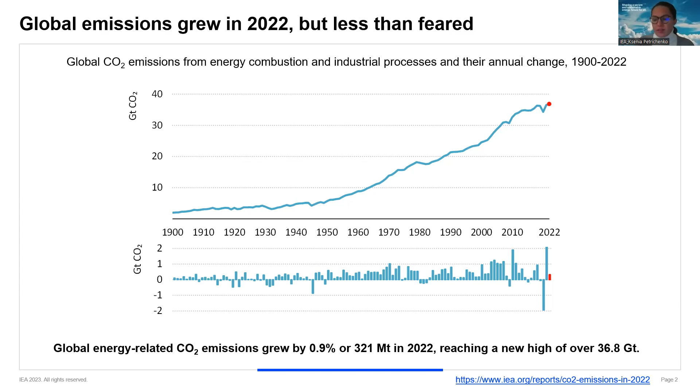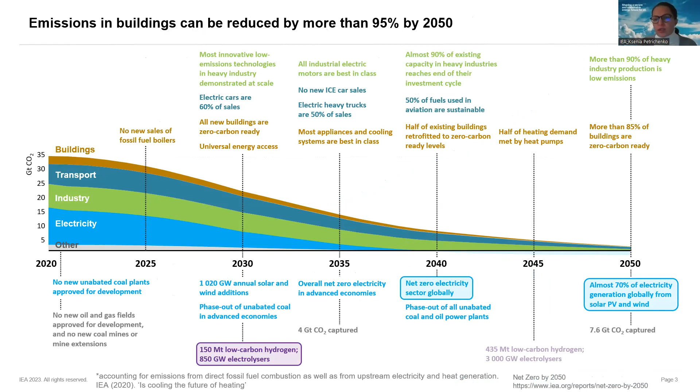With that, we at IEA developed a roadmap to net zero by 2050, which looks at different sectors and outlines more than 400 technological and policy milestones which need to be achieved between 2020 and 2050 in order to get to those very close to zero levels by mid-century, making sure we can achieve 1.5 degrees centigrade of global warming and not exceed it.

The pathway is still realistic, though the speed at which we are progressing is alarming, as we saw from IPCC reports. In any case, most of the solutions we have, especially if we look at buildings specifically, already exist, and most of them are cost effective in many countries. So what is needed is really accelerated and concerted action on those.

If we look at buildings, here it's only direct emissions from the building sector, that's why it's relatively small in comparison to other sectors. The emissions from electricity consumed in buildings are counted in the electricity part of the chart.

If we look at those milestones, we can't go into details with all of them, but you can have a look at our report. It really comes down to a combination of three things. First of all, improving energy efficiency in buildings, and actually this goes across all sectors. In buildings, it means more energy efficient envelopes, more energy efficient equipment and appliances, phasing out use of fossil fuel boilers as one of the first measures, and getting buildings to become zero carbon ready, as we call them.

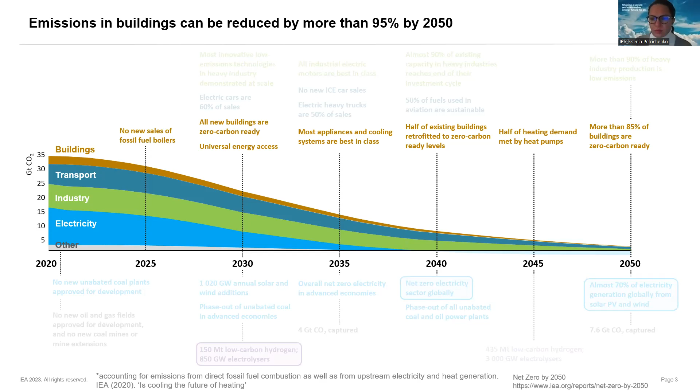So the second thing which we would need to stay on this net zero carbon pathway is a massive shift towards electrification, electrification of different end uses in buildings. It's heating, cooking, ventilation, cooling—all need to be electric.

That also explains quite a significant uptake, for example, of heat pumps, especially in heating-dominated climates, as one of the most efficient technologies for space heating and water heating. They can also be used for space cooling sometimes. And the third thing we need is the electricity supply to buildings needs to be decarbonized, coming from low carbon sources, including variable renewable energy such as solar and wind.

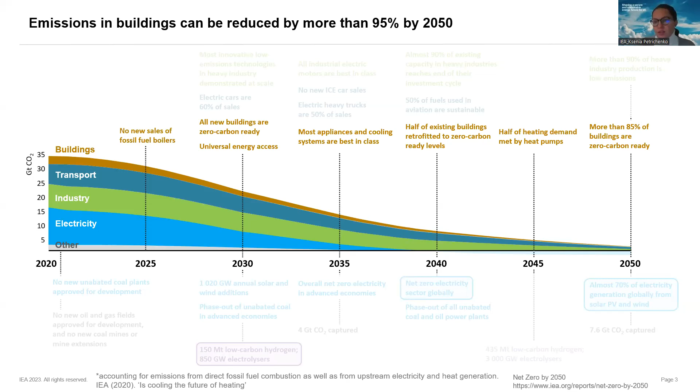Energy efficiency plays a crucial role in this net zero pathway across different sectors, but it has the largest potential in the building sector. As you can see, by mid-century it's responsible for about half of energy savings, and the rest comes from switching to electricity, fuel switching—mainly switching to decarbonized electricity—and behavior changes, which is also very important.

Without having users on board and consumers who are aware why we need to reduce energy use in buildings and how they can do it themselves, it's almost impossible to realize this potential. Avoided demand also includes things like digitalization, smart controls, and any other automatic tools which can help avoid unnecessary demand and optimize energy use in buildings.

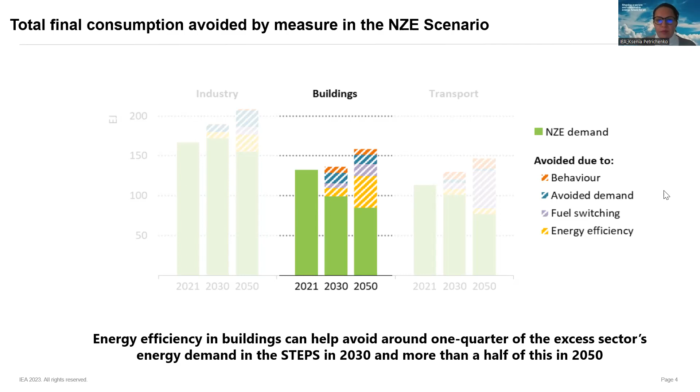Of course, in order to stay in this pathway and realize this potential, we need substantial acceleration of investments and directing investments towards more energy efficient and decarbonized options. We estimate that investments into clean energy need to more than triple by 2030, already within this decade, in order to proceed on this pathway towards net zero.

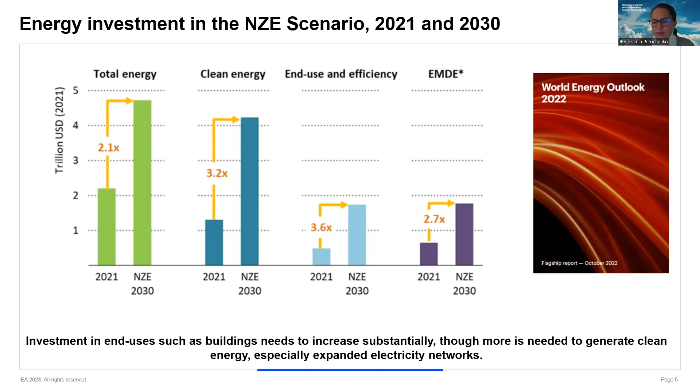For energy efficiency, we need a 3.6 times increase in global investments. A lot of these investments need to take place in emerging economies and developing countries, with a 2.7 times increase in the current levels of investments in those regions.

If we look at Africa, the building sector plays a major role in the region. This is data from 2018, but I presume the picture hasn't changed substantially. The building sector is responsible for more than 60% of the final energy consumption in the region. It's a huge share. In many regions buildings are responsible for a smaller share, but for Africa the building sector is really important. So the question is what we can do about it.

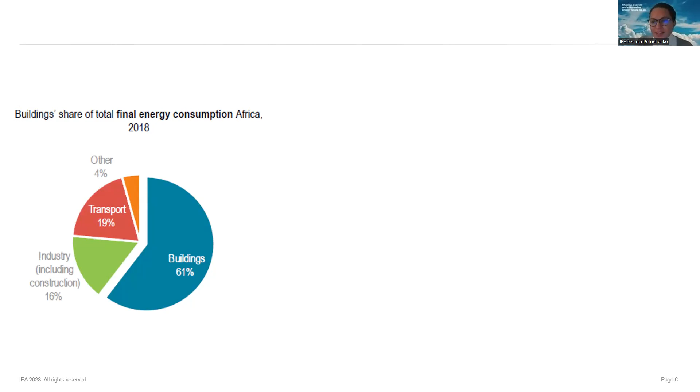I hope we're not hoping for any magical solution. We actually do need to make sure that a lot of efforts are happening in order to tap into this potential for energy savings in the building sector and realize the potential in order to at least get closer to the net zero pathway. How do we do that?

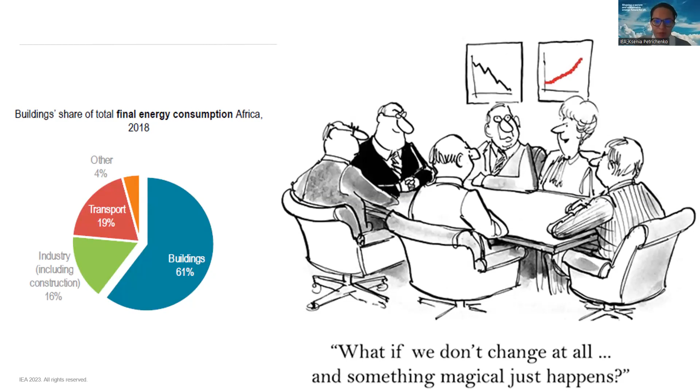We do that through policy development and implementation. Policies are very important because they help us to address a variety of barriers which exist in relation to improving energy efficiency in the building sector.

Financial barriers, so access to finance for funding energy efficient projects, is another typical barrier. Technical barriers - some technological solutions might not be available locally or might not be adapted to the local context of a specific country. Low awareness among both population and policymakers and other stakeholders on the benefits of energy efficiency is a major barrier as well, because it prevents making choices towards more energy efficient options.

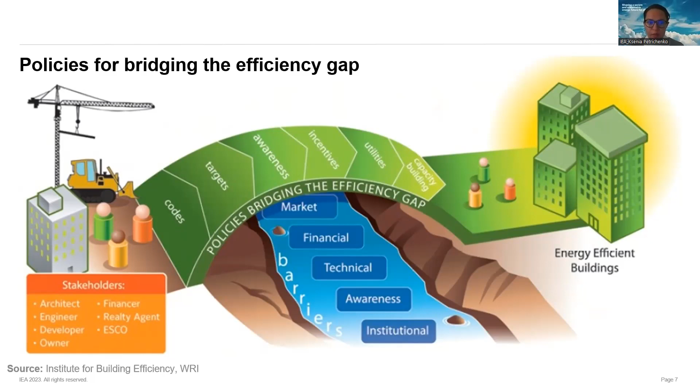And of course, institutional setup is very important in order to drive this policy change, develop policies, and support implementation of different policy mechanisms. On top of that, the building sector is quite complex and very fragmented. It includes different stakeholders who sometimes don't talk to each other or have different interests. So it's very important to have different stakeholder groups on board in this policy development process to make sure we get their inputs and their interests taken into account when approaching the development of policies.

In that regard, we talk about a policy package. Given that the sector is so complex, we also do not have one single policy instrument which can solve all the problems and address all the barriers. So we need a variety of policy instruments to address different barriers and engage different stakeholder groups.

When we talk about a policy package, we mean quite a comprehensive policy framework, which usually starts with setting a target that is both ambitious and realistic in order to improve energy efficiency in buildings. This target informs the choice and combination of different policy instruments depending on the country's context, which usually has a combination of regulatory instruments, information mechanisms, and incentives, and we will look at them in more detail.

Once the policy package is established, the implementation part is also very important. It is one thing to have policies in place or on paper. It is another thing to make sure that they are well enforced and different stakeholder groups are aware of them and comply with the requirements of these policies, or use them in order to realize that energy efficiency potential.

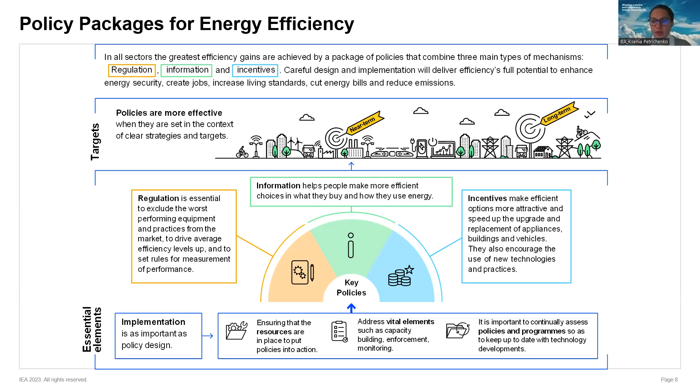So if we look at buildings, I mentioned the policy package consists mainly of three types of policy instruments: regulatory, information, and incentives.

Within the regulatory pillar, we usually have instruments like targets for energy efficiency, including deep renovation rates, fostering market growth, and facilitating investment decisions.

Building energy codes are one of the most effective and cost-effective policy mechanisms across the world. They usually contain requirements for energy efficiency for both new buildings and retrofits, and they're really essential to accelerate the transition towards more efficient buildings.

Minimum energy efficiency requirements can be both for buildings, especially during renovation processes, so for existing buildings to achieve certain levels of efficiency during the renovation process, but also for example for appliances and equipment used in buildings.

And another area of regulation which is emerging is related to the use of digital and smart tools in buildings, and for buildings to become more integrated with the electric grid. We call them to become more demand response ready, when buildings can actually respond to signals from the grid and offer flexibility services.

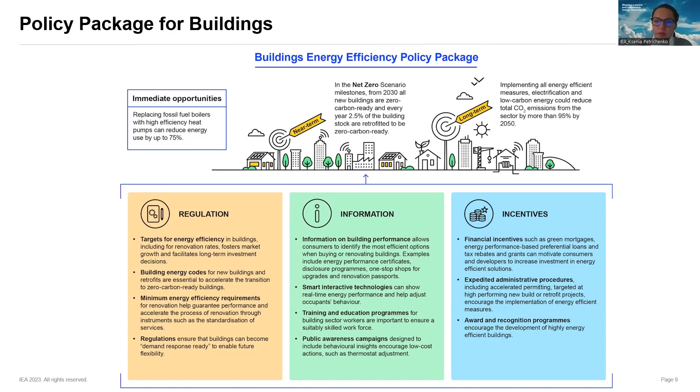So why do we need this policy package, and what role does it play? When we look at regulations, the main purpose of the policy package is to ensure market transformation. What we need is not just pilot projects for energy efficient buildings here and there. We actually need a whole market to transform towards higher levels of energy efficiency and make sure energy efficient or zero carbon ready buildings become mainstream.

In that regard, regulations work as sticks. They offer a market push towards at least minimum levels of energy efficiency required in buildings.

Information instruments, we sometimes call them tambourines - they help to lift the market towards these levels and assist the regulatory instruments. And incentives, both financial and non-financial, offer market pull, helping to pull the market beyond these minimum levels of required energy efficiency towards even higher performance, towards innovation, towards best practices implemented in the market.

As you can see, these three types of policies really need to work together to be able to offer those synergies and deliver the energy efficiency potential.

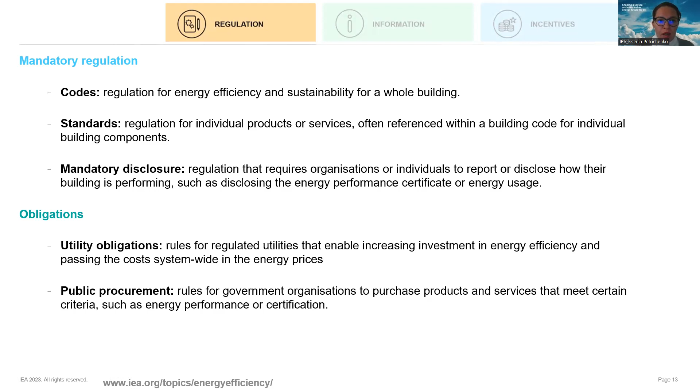There are several types of building energy codes, which is good to know because they really vary from country to country. There are a number of prescriptive codes, which are very close to standards, which set specific requirements for some of the elements.

There is a trend to move more towards performance codes, which set a minimum level of energy performance required for a certain building type, maybe depending on the climate conditions. This performance can be achieved through different pathways with different elements, so there's no need to implement certain energy efficiency measures as long as the overall performance meets the requirement.

Simple trade-off is kind of similar to prescriptive codes, but they are less documented, so there is also more flexibility on how the requirements can be achieved between different components.

Outcome-based codes are a very interesting type, because that's when we move away from theoretical energy, which is usually used in most codes through a model or assessment done at the design stage. Outcome-based codes actually take the measured energy use in buildings and set requirements based on actual use after the building was built and occupied. So obviously it has a next level of accuracy because it also takes into account behavior of people, not just the design.

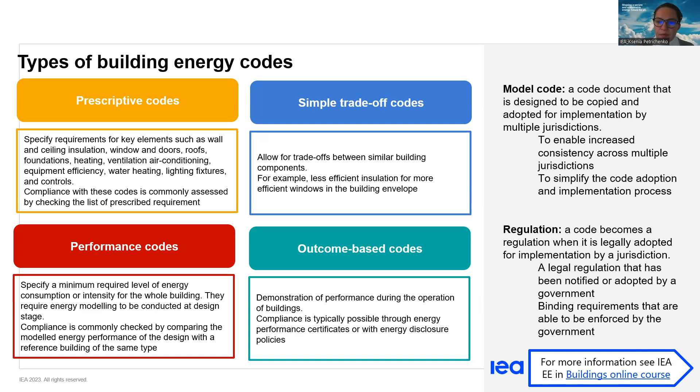At the global level, we have about 80 countries which already, as of last year, have implemented one form or another of the building energy code. Some of them are mandatory, some of them are voluntary. About 30 countries are in the process of developing a building code.

But from this number of countries, only two-thirds have mandatory building codes. And our research shows that voluntary building codes, while it's good to have and it's very informative and provides a certain level of information to the market, are much less effective in terms of achieving the impact—in terms of achieving actual energy savings—than mandatory building codes.

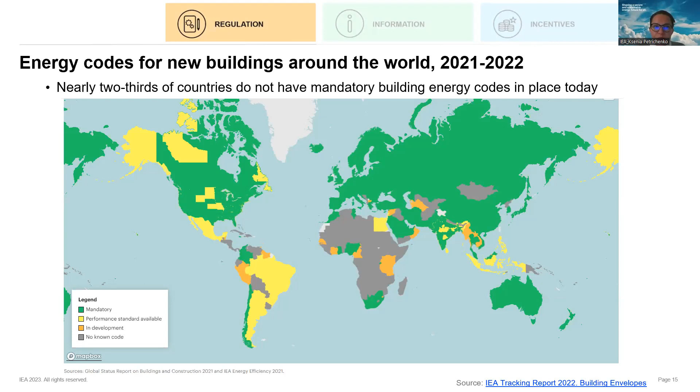As we're talking about the net zero pathway, building codes are really one of the more fundamental starting points to begin on this pathway, and they do take time to develop. We looked at some countries with a long-term history of building regulations and energy efficiency requirements, and our research showed that it could take anywhere from 6 to 22 years from the announcement of a net zero goal for buildings to the development and implementation of the building energy code that reflects that target. So it's quite a complicated and long process, and it just shows that we need to start working on it as soon as possible.

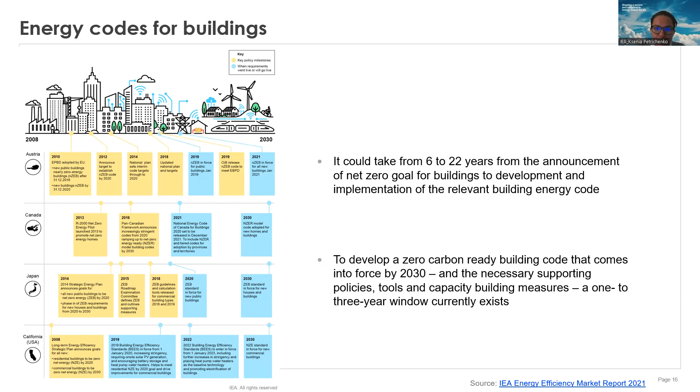In terms of implementation of the building energy code, as I mentioned before, it's not just enough to have a policy in place—we actually need to make sure we implement it well and it works. For building codes, usually there are different implementation mechanisms which include inspections, checks for compliance, and different permits. So this is just a generic process of how it can look.

We can start with, usually, a construction permit at the design stage, where there is a designated authority which reviews the plan, the calculations, the proposed materials, assumptions, and the model used for achieving the results for the design of the building.

There are, in some cases, checks at the construction stage as well to make sure that everything goes well, but in many countries it's mainly focused on safety requirements and much less on energy performance requirements. Several countries have in place the occupancy permit, so after the whole building has been built, we also need to check compliance before occupancy happens. It can be tied to issuing this occupancy permit to make sure that all those stated measures for energy efficiency have been implemented during the construction process. In rare cases, there are also compliance checks post-occupancy to make sure the building is functioning the way it is supposed to.

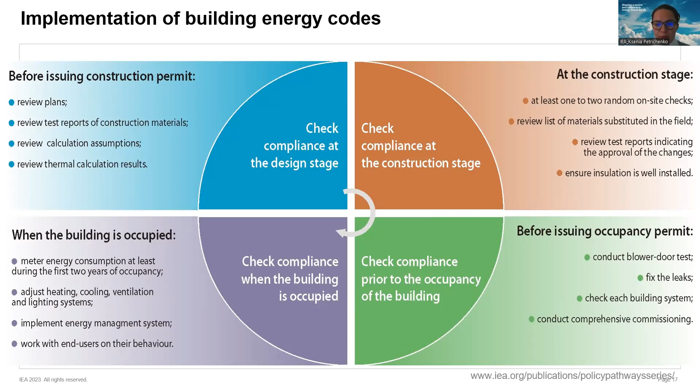Moving to the information part of the policy package, here we have instruments like energy performance certificates, which document basic building information and energy performance. They very often come together with labels, both for example for appliances and equipment, or for the building itself. Building passports are becoming quite widely used in Europe, which is even more detailed documentation for buildings, including construction materials, systems in use, but also different renovation cycles and energy efficiency measures implemented during the renovation process. I mentioned already capacity building, so things like education, training, professional certification, and authorization are also instruments which can help deliver the policy package.

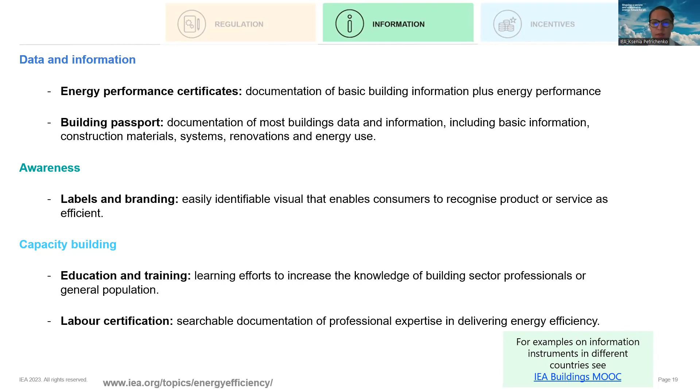These are just some examples of what I meant by energy performance certificates. I'm sure you've seen them, and there are a number of African countries who also have similar schemes and approaches. This is just from several European countries. They usually have some sort of classification and position of the building in one of the energy classes, and their performance in terms of different indicators - it can be energy consumption per square meter, it can be carbon performance, can include information on energy costs as well.

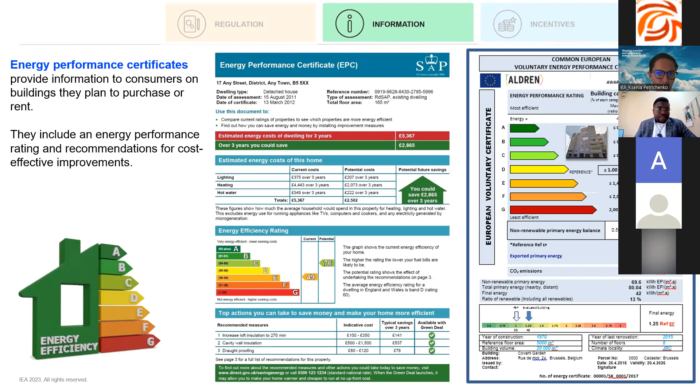And the last pillar is on incentives. I mentioned we have both financial and non-financial incentives. Financial is quite straightforward - it's different loans, rebates, mechanisms, grants for specific energy efficient products, or for example for renovation measures which can help improve energy efficiency in buildings. Non-financial incentives can be something that doesn't involve monetary reward but still helps incentivize construction or renovation of more efficient buildings. For example, for more efficient buildings, the times for approvals and receiving those permits can be reduced - expedited procedures - or they can get permits for larger buildings if they are performing better.

Some examples of financial incentives. In Europe, they have become quite prominent, especially in the past couple of years, given that energy prices have increased so much, and the region is really trying to reduce reliance on fossil fuels, also in relation to the ongoing war conflict between Russia and Ukraine. So a lot of incentives are going to energy saving works, the renewable heating system in France for example with interest-free loans for renovation works. In Scotland, we have the Warmer Homes Scotland grant, which can cover up to 100% of costs for upgrades to reduce home heating costs. Energy efficient mortgages are another way to incentivize borrowers to improve energy efficiency of their buildings, and it's not only common in European Union, but also in countries like India and China.

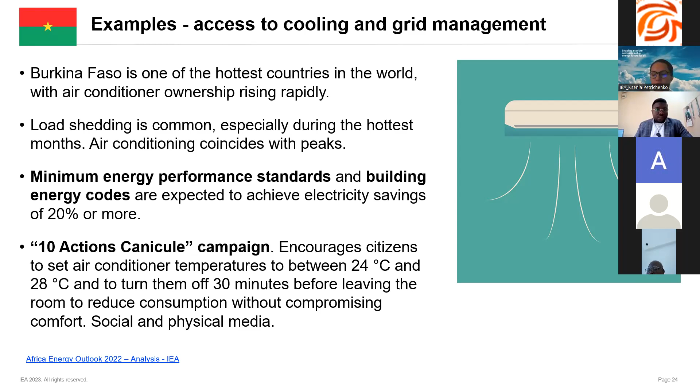A quick example from Africa, from Burkina Faso, on cooling. The region relies on space cooling more and more due to the climate, and as climate change puts more pressure on increasing temperatures, it will become even more crucial. It is estimated that minimum energy performance standards for air conditioners and building codes to improve building envelopes can deliver at least 20% savings on electricity in the country. There is also an awareness raising campaign called 10 Actions Canicule, which encourages citizens to set air conditioner temperature a bit higher than usual, between 24 and 28 degrees, and turn them off 30 minutes before leaving the room, in order to reduce overall energy consumption for cooling without significantly compromising the thermal comfort of people. This campaign goes through different social media and physical media channels to explain why it is important and what people can do.

I would like to have a quick run through of a real case for a policy package example, how it looks like for example for Australia. It's a country which also has a quite cooling dominant climate, which is relevant for the Africa region as well, and also has a long history of implementing various energy efficiency policies in buildings.

So I think it's just interesting to see how different policy instruments interact in practice in this example.

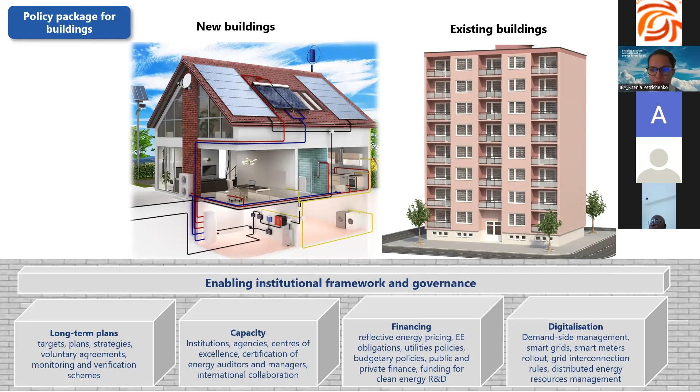Just to remind what we mean by policy package: there needs to be some enabling institutional framework and governance, which includes certain targets, plans, and strategic vision for energy efficiency improvements. There should be sufficient capacity in terms of institutions and skilled workforce. Financing: there should be financial mechanisms and budgetary mechanisms to support energy efficiency improvements. And digitalization, I already mentioned, there are several digital tools and smart solutions which can also drive energy efficiency in buildings further. They're kind of cross-cutting, that's why they're supporting this framework.

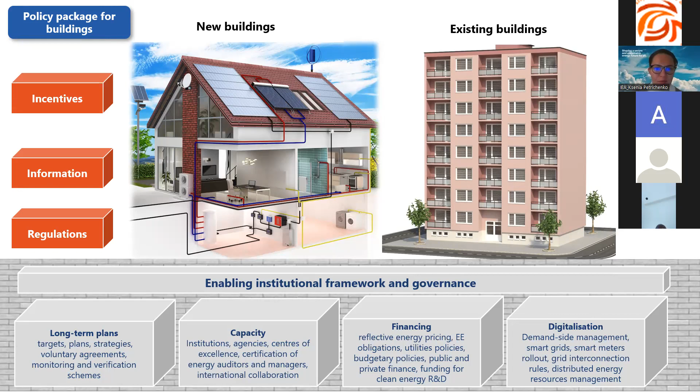And we will look at regulations, information, and incentives as the three key pillars we just discussed. In terms of regulation, in Australia it is based on the National Building Energy Code, which has quite a long history. The first building code was implemented in the 80s. It's mainly focused on overall safety and energy requirements, but really from the beginning of the 21st century, they started integrating energy efficiency provisions and updating the building energy code every 3 years, strengthening those requirements more and more.

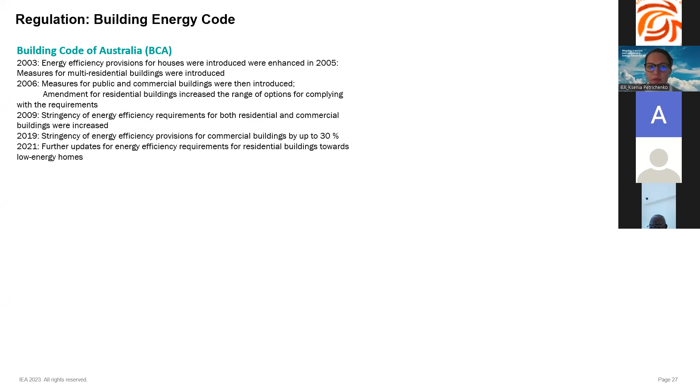There is certain flexibility in compliance with those requirements. There are performance requirements for different types of buildings, but there are also more element- or component-based requirements prescribed for different parts of the building, such as building fabric, glazing, and so on. And there are several alternative solutions which need to be approved by the Building Control Authority, who inspects and manages, and makes sure that those requirements are being met. So either performance-based requirements need to be met, or some combination of component-based and alternative solutions needs to be implemented. It's a quite thorough verification process to make sure they're actually being met.

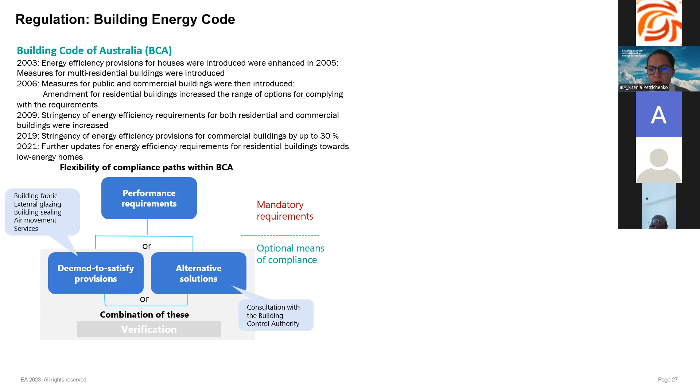Australia has 8 climate zones specified in the building code, so they set specific energy efficiency requirements depending on the type of building, but also on the climatic zone. Different states and territories at the subnational level have their own building acts to document how these requirements are actually going to be implemented in their specific context.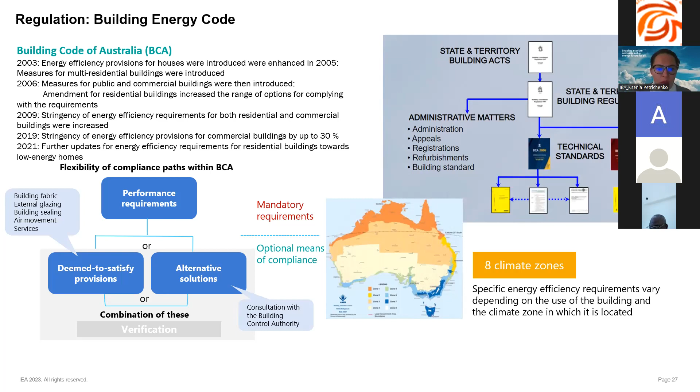Another important instrument of the policy package, which is kind of on the border between regulatory and information type instruments, is mandatory disclosure, certification, and labeling. These are slightly different instruments, but they're all linked together by the rating system in place in Australia, the National Australian Built Environment Rating System, or NABERS, which includes components of all these 3 elements.

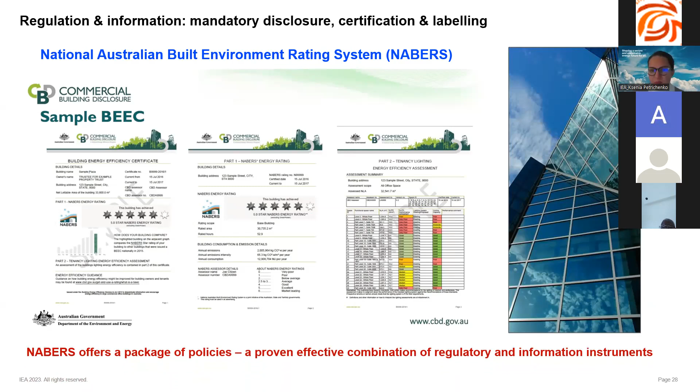It already in itself offers a package of policies and links different policies together in an interesting way. Basically, it's a rating system. For commercial buildings, each building, depending on the assessment and inspection, receives a building class represented by a star, from 1 star to 6 stars. The better performing the building, the more stars you get. And there are certain requirements set in relation to the number of stars.

For example, government buildings can be leased only if they achieve 4.5 stars. If they have lower performance, they cannot be leased, so you can't make money on this. So you have to make certain investments and improvements on energy efficiency to get to this level of performance.

I started talking about governmental buildings already. There are a number of other instruments linked to that, including what kind of lease they can get, or they also need to report every year on building performance, and if they don't comply with the requirements, it's mandatory for them to improve building energy performance.

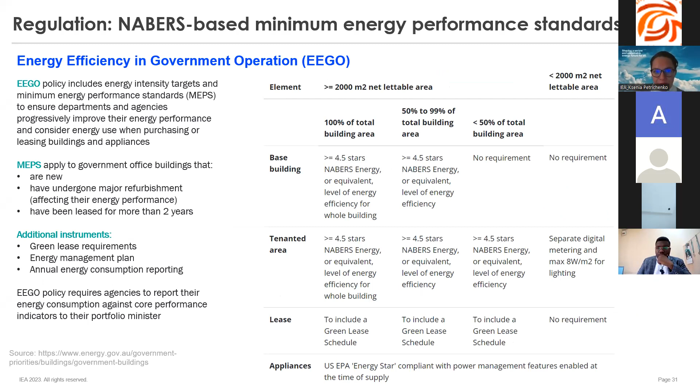For residential buildings, there is a similar scheme called NatHERS. It has 10 stars. For residential buildings, the performance of the building is also assessed, and this kind of document is issued. This year, or last year, it has been expanded to include also performance of appliances and equipment, so it has both requirements for building envelope and for equipment within the same scheme.

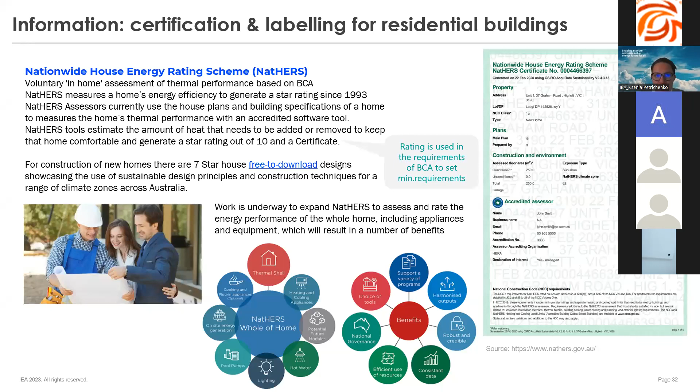Very interestingly, incentives, which are usually set on the subnational level, are very often linked to this star rating system. For example, in some cases you can get financial incentives, a grant, or a rebate if you can improve the performance of the building by 1 star or by 0.5 star. There are also incentive schemes for specific equipment, such as solar systems or electric vehicle chargers, depending on which territory or state in the country we're looking at.

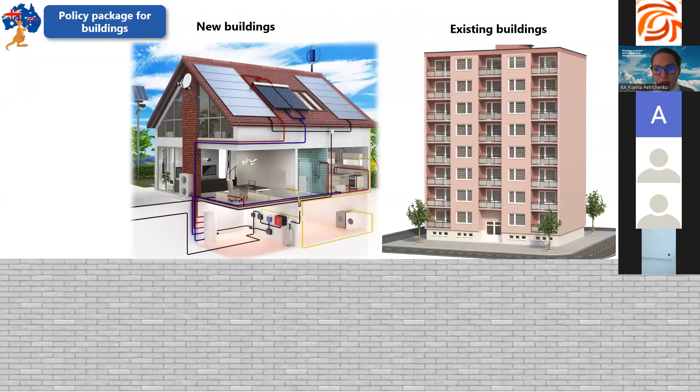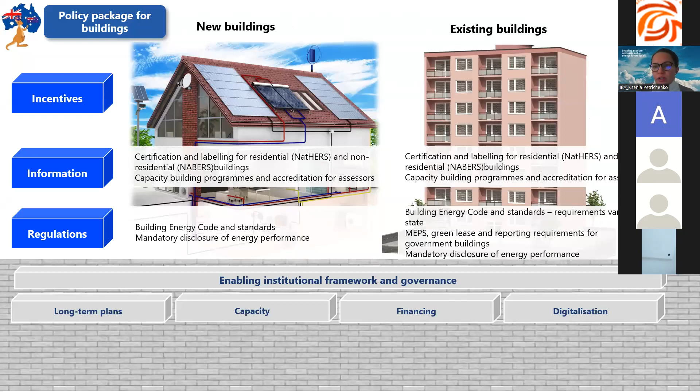Just to summarize, as you can see, for a real policy package, Australia has all 3 pillars we discussed. For regulation, it's building codes, which look at both new and existing buildings, as well as mandatory disclosure of energy performance, minimum energy performance standards, and green leasing reporting requirements, especially for governmental buildings. In the information pillar, it's certification and labeling for both non-residential and residential buildings, along with different capacity building programs linked to certification schemes. Financial incentives are linked to improved performance of buildings, both in terms of design of new buildings and upgrades of existing ones.

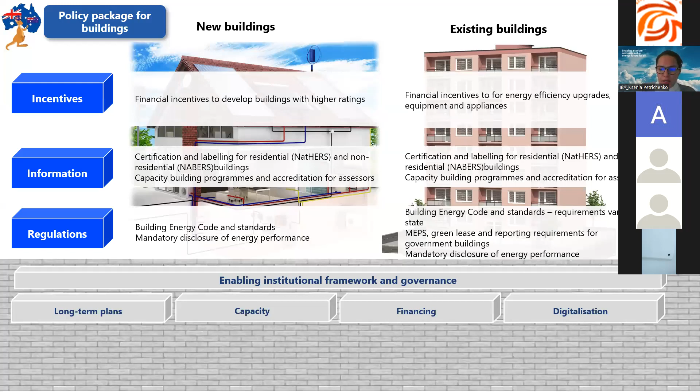Buildings are becoming more and more incorporated into energy systems. So we need to look not only at buildings themselves, but also at buildings in the context of the broader energy system, electricity system, and power grids. As buildings are becoming more energy consuming, they are also equipped with technologies using electricity, such as heat pumps and electric water heaters. Electric vehicles are also becoming part of the building—we already have 90% of electric charging happening in the building sector—along with rooftop photovoltaics and distributed energy storage, which are crucial for achieving the net zero pathway.

All this equipment is important for reducing greenhouse gas emissions, but at the same time, these distributed energy resources can also put pressure on the electric grid and influence stability of electricity supply if they're not managed and aggregated efficiently. That's why digitalization becomes very important.

There are already digital and smart tools for data collection, analytics, and smart advanced controls of both distributed energy generation, for example from solar systems, and energy consumption, in order to balance that at the grid level.

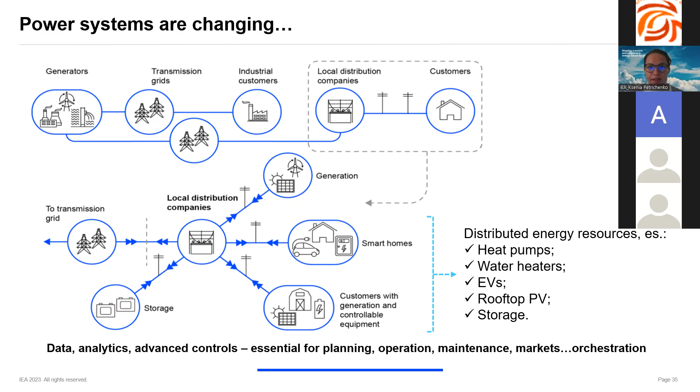This aspect of the grid and the interaction between different distributed energy resources and the grid brings demand response availability into the picture—how these different points of generation and consumption of electricity can interact with each other efficiently. There needs to be some demand responsiveness from distributed energy resources, buildings included, towards signals from the grid.

For example, when there is a lot of pressure on the grid, or congestion, or peak demand—so the price increases too much, or we need to use backup fossil fuel capacity because there is a spike in demand—how can buildings or other sectors respond to that?

According to our analysis, in order to stay on the net zero pathway, we need to increase this availability of demand response by 10 times between 2020 and 2030, and about half of it will have to come from buildings. So buildings actually offer the largest potential for this kind of demand response.

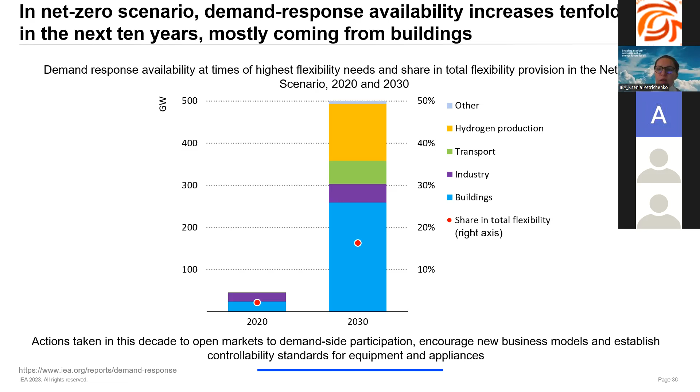That's why we are also looking into the topic of efficient grid-interactive buildings. These are buildings which have very efficient envelopes, as we've been discussing, and different efficient systems, so their demand is reduced as much as possible without compromising on thermal comfort and function.

At the same time, they're characterized by use of distributed energy resources such as smart solutions, smart meters, building management systems, photovoltaics, and distributed storage, in order to optimize energy use and provide flexibility to the grid. By flexibility, I mean changing the pattern of energy consumption, shifting the load of the building in response to grid signals to other times, or completely reducing energy consumption based on signals from the grid.

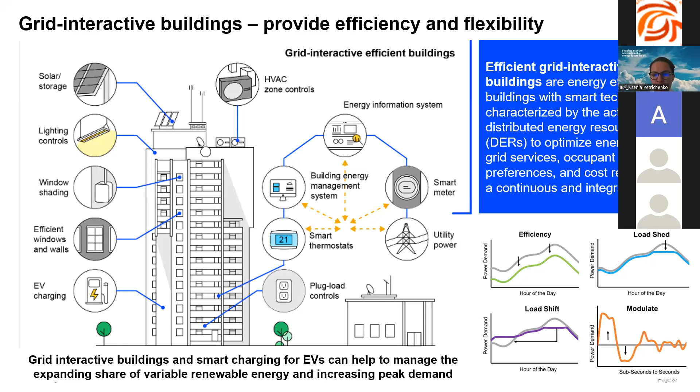There is already progress being made in some jurisdictions to incorporate this demand responsiveness of buildings, or grid readiness of buildings, into building regulation. There is an example of California building standards from last year, where the standard itself encourages buildings to become ready for the uptake of demand response.

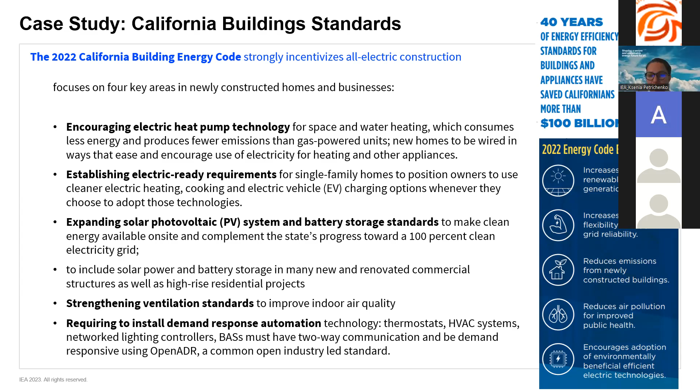They're encouraging installation of electric heat pump technologies. They have a number of electric-ready requirements for different appliances and for EV charging, expanding requirements for solar photovoltaics and battery storage in buildings, strengthening ventilation standards, and requiring installation of demand response automation, including for thermostats, HVAC systems, lighting, and other end uses, so that they can participate in demand response programs once set up at the electricity utility or electrical grid level.

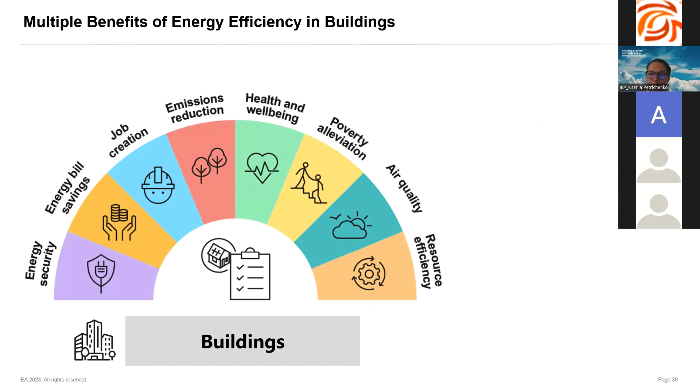We should not forget that energy savings is only one part of the equation. Energy efficiency in buildings comes with a number of other benefits. We looked at them in our recent roadmap for buildings and construction in Southeast Asia, but they are applicable to other regions as well. Energy security, of course, increases as we reduce reliance on fossil fuels.

Energy becomes more affordable as we reduce energy demand through energy efficiency. Energy efficiency also creates jobs, contributes to mitigation of climate change, and improves health and well-being as we achieve greater levels of thermal comfort—linking to air quality, for example, as we move away from using traditional biomass and other polluting fuels for cooking towards more efficient and clean cooking technologies, and so on and so forth.

So really, energy efficiency in buildings can deliver benefits on multiple fronts.

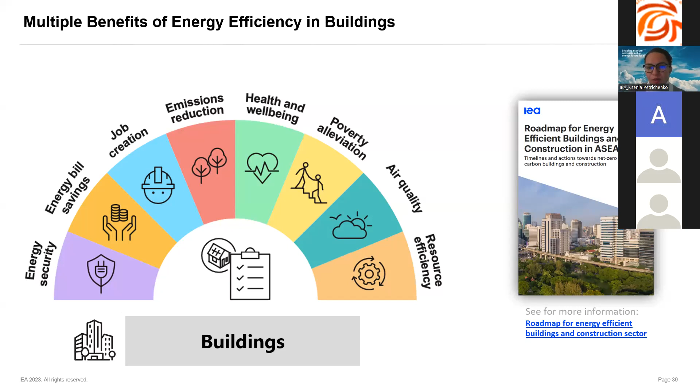To sum up, the recommendations for development of an effective policy package include a number of different instruments, starting with regulations, so building energy performance codes, certification, labeling, and incentives as supporting mechanisms for the regulatory instruments, and capacity building to make sure we have sufficient skilled workforce and capacity to implement those policies.

A data collection system is very important to make sure that we can track progress and document the impacts of our policies. A monitoring and tracking framework can help to do that across the policy implementation cycle.

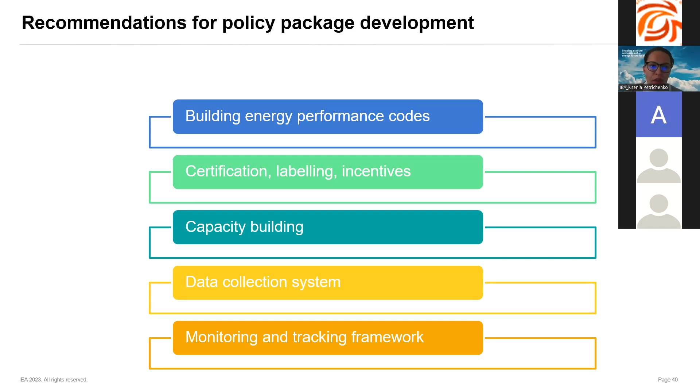With that, of course, there are still many barriers which remain, and different countries have different conditions. So that will be one of the main subjects of our discussions at the upcoming 8th Annual Global Conference on Energy Efficiency, which this year will take place in the beautiful city of Versailles in France in the beginning of June. We have this conference every year.

Last year, it took place in Denmark, where we had 26 governments issuing a joint statement with a call for action on accelerated energy efficiency efforts across different countries around the world.

So this year, we will also have a very interesting discussion with many experts and policymakers joining us for different sessions. With that, I would like to finish my presentation, and thank you very much for this opportunity.

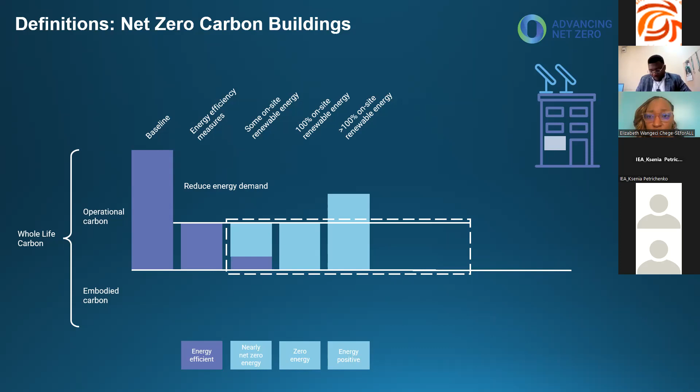So the main elements we've seen, especially looking at low-cost housing and traditional housing, is that our conversation in Africa can really speak to passive design principles. Before we start even looking at technologies, we need to look at how we can design for climate.

That goes to show the consideration: we have a baseline energy efficiency measures by reducing the demand. Then we move on to adding the technologies of 100% on-site renewable energy, off-site renewable energy if possible, and then compensate for residual emissions. In Kenya, I just want to highlight that the electricity grid is 92% renewable energy, so it gives a great opportunity to start looking at where the source of power is, as well as on-site renewable energy.

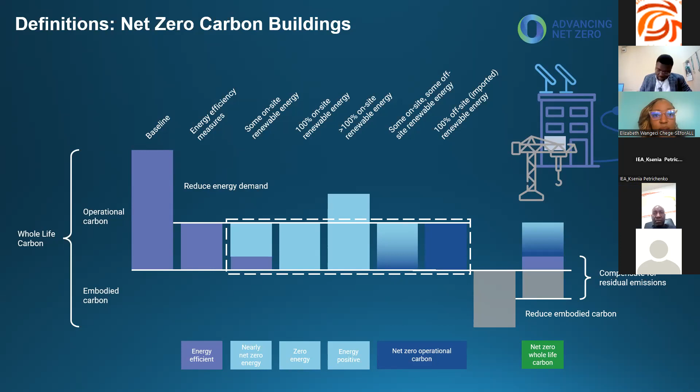So I mentioned advancing net zero whole life carbon systems as well, and you'll see the narrative is very similar: on the basis of operational carbon, it's to reduce and optimize energy demand. That's why energy efficiency is so key. Then generate the balance from renewables, compensate for residual emissions, then plan for deep decarbonization. On the embodied carbon side, the element is to prevent. If you're able to reuse an existing building, that's better. But a note in Africa especially, we're looking at building our cities and our infrastructure.

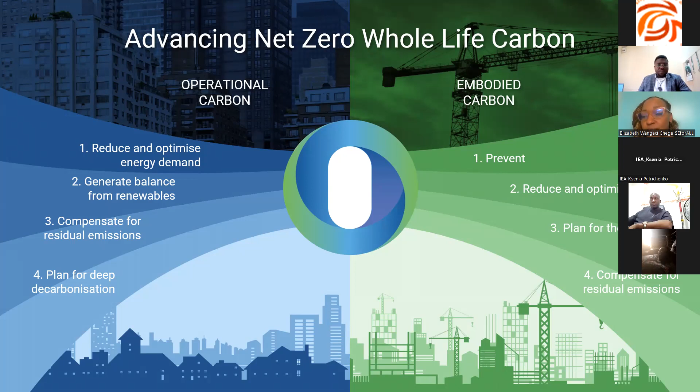So planning for the future, our building codes really need to speak to net zero by 2050. We also need to look at our existing cities and compensate for residual emissions. The goals there, 2030 and 2050, I mentioned before. I want to read through that again. And also we need to create leadership as well.

Through these programs, we try to bring everyone together so that buildings, businesses, and organizations can actually work together towards a common goal.

So the theory of change here is collaboration, communication, education, innovation, and regulation. I like that these slides very much speak to the policy presentation that was done earlier. In all this, we need to do it so that we can accelerate and harness the power of voluntary, financial, policy, and regulatory market forces.

If I quickly just highlight energy efficiency, there are multiple benefits, and we would like to have more of that showcased. There's the climate progress: cost effectively contribute 40% of the emissions savings goals of the Paris Agreement. 40% is a huge number.

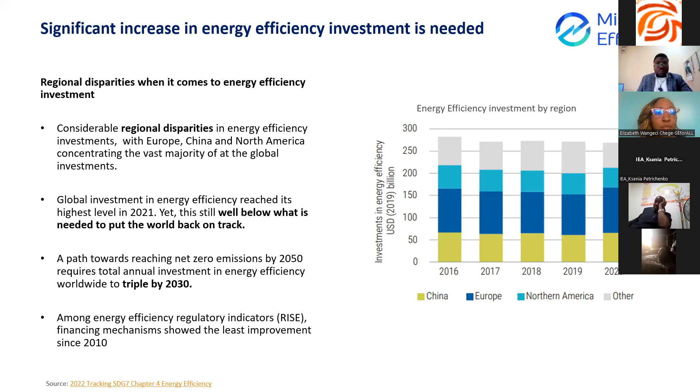On to my second last slide—just a reminder of the steps towards achieving net zero. Include prioritizing energy efficiency; implement energy efficiency measures as the first priority. We call that soft landing: designed to enable flexible use and low impact renovation, sufficiency, design and materials for passive heating and cooling, and technologies, efficient appliances and equipment.

Also, there's low impact materials: reduce life cycle emissions and embodied carbon of materials, including climate-friendly refrigerants, especially in cooling. Electrification—there are strategies out there in Africa, and also I note in Kenya it's being drafted to electrify cooking, water, and space heating in advance of a cleaner grid.

Digitalization has been mentioned before, great opportunities with that—apply digital controls and technology to optimize energy and demand. There's a services part of it, and I expect some of the people on the call would be part of those giving these energy efficiency services, which is commissioning, recommissioning, and audits. We do talk a lot about energy audits, which are core. We have energy efficiency itself, which provides a service and also creates jobs.

Operations: engage occupants and implement operational best practices. And then second last is renewables, which most people understand: meet energy needs with on-site, local, or purchased renewable energy.

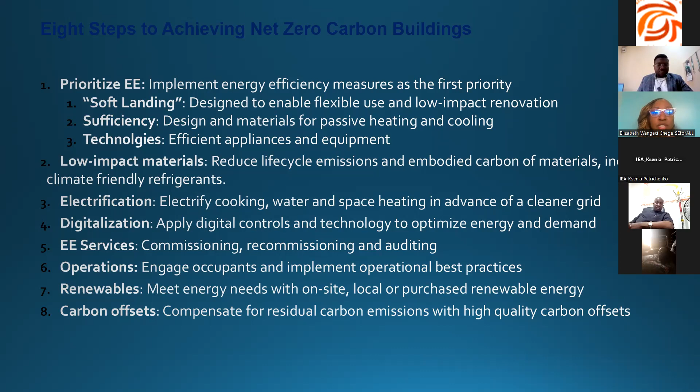This looks at investing in buildings, especially given the challenge that we're locking in a lot of carbon in global energy related emissions for 40 to 100 years. The opportunity is that with action, it's possible to achieve passive homes and net zero buildings, especially with the climate we have in Africa.

Investing in efficient buildings could yield important economic benefits. I like this: every dollar invested in energy efficiency saves $2 in energy supply costs, and every dollar invested in efficient new buildings saves $10 in future reconstruction. So especially for cities designing or building now in Africa, there's a great opportunity to save a lot if we do it right from the beginning.

I'll move on to technology, which has already been covered in detail. There are also business models in energy efficiency, in building design, analysis, audit, commissioning services, but also life cycle perspectives, ESCOs, equity investment, government affordable housing schemes, and performance contracting. So we're now talking about energy efficiency in business and seeking business models.

Then there's market readiness, which involves technology selectors, building certificates and rating systems, investor confidence projects, building passports or EPCs that have been mentioned, and smart readiness indicators. Last but not least is the financial element: regulated utility or city funding, green mortgages, and opportunities around preferred terms for energy efficiency in buildings.